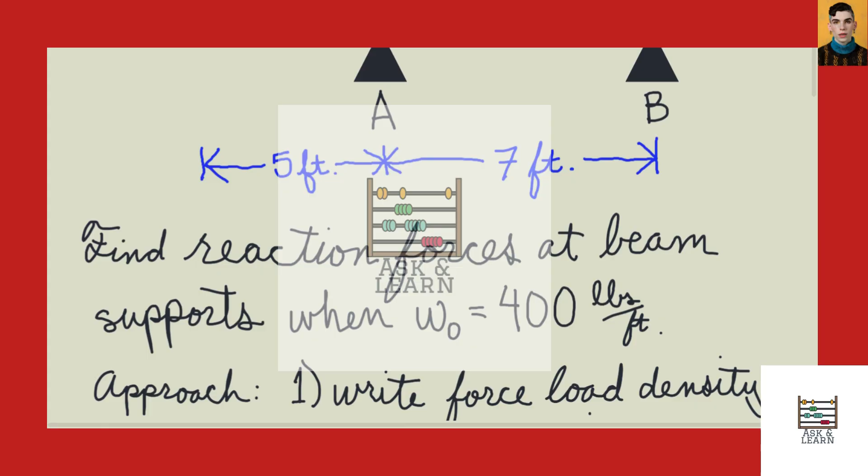We are asked to find the reaction force at supports A and B given their location along the beam at 5 feet from left and 12 feet from left, or the span between them is 7 feet. Later, this problem also gives us the value for W sub naught, our force density value at the extreme left-hand side of the beam. We're given a value of 400 pounds per foot.

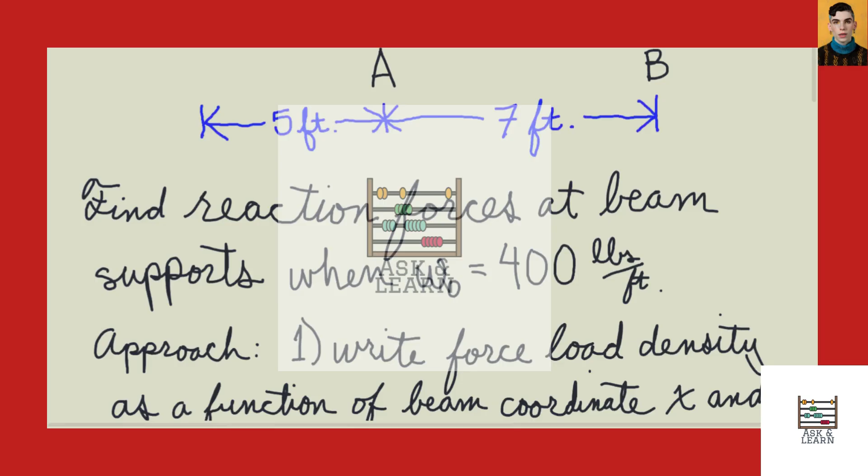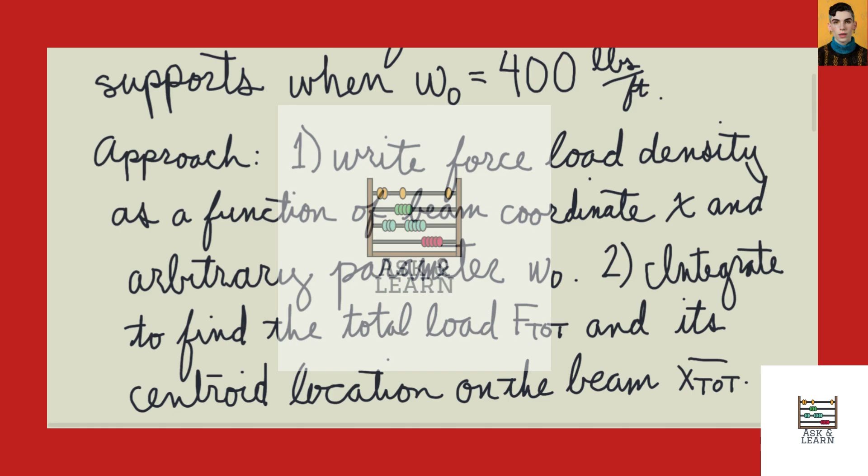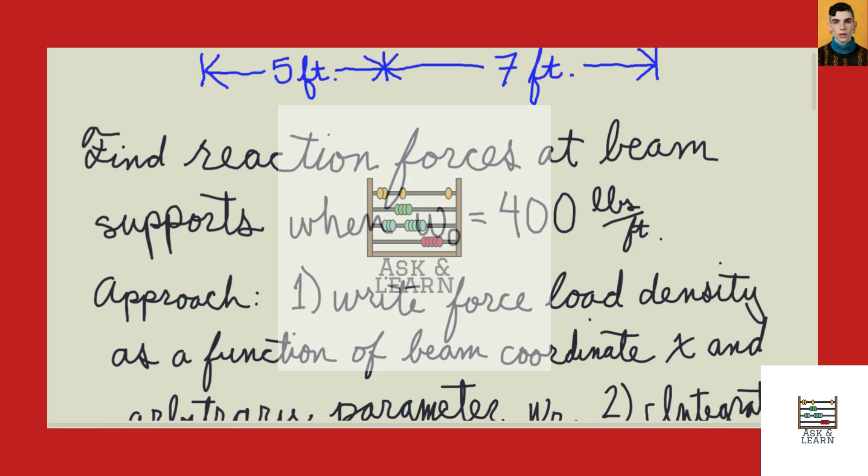The approach we're going to use to solve for these reaction forces at each of the supports is to first write out the load density, this linearly varying relationship, as a function of the beam coordinate x, that's the span from the leftmost point, and in terms of the arbitrary parameter that we are given. But for the next problem, it's better that we keep it arbitrary as long as we can.

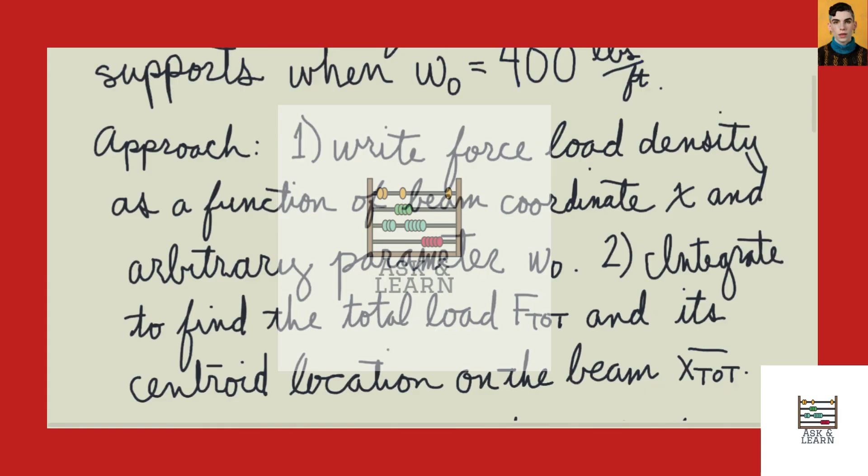This parameter we will symbolically represent as W sub naught. Next, we'll integrate that function to find the total load, integrated over the span coordinate x, to find the total load that we'll denote here as F total. And it's going to be pointing downward from the load. The reaction has to exactly oppose that.

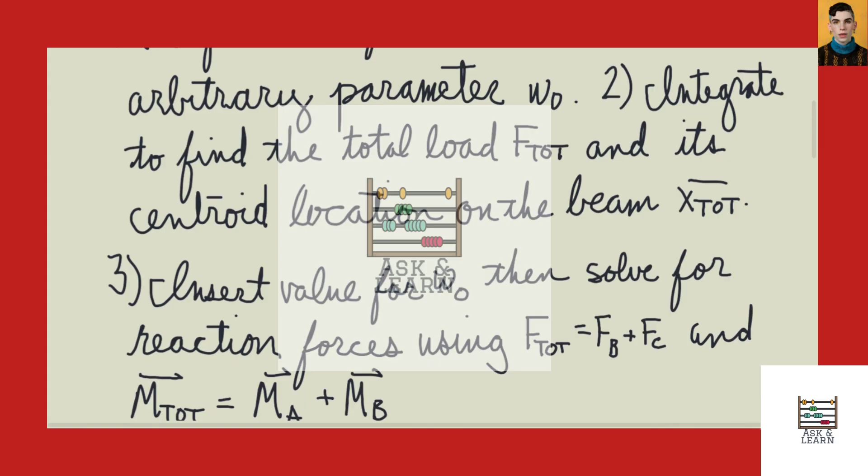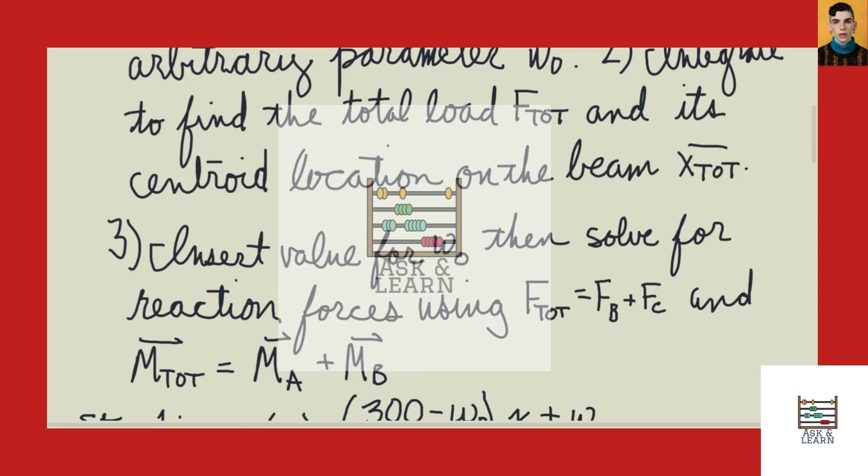We will also calculate the centroid location on the beam using the function we derived in step 1. Finally, we will insert the specific value we're given of 400 pounds per foot for W naught, and then we'll solve for the reaction forces at each of the supports using the usual statics equations that were given.

If something is static, it cannot move linearly in space. It can't have any translation. So the opposing forces of the supports, the sum of those forces will exactly cancel

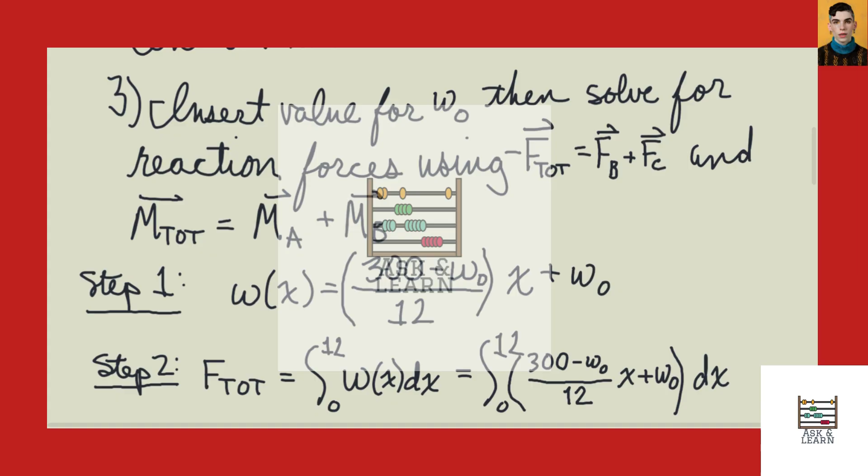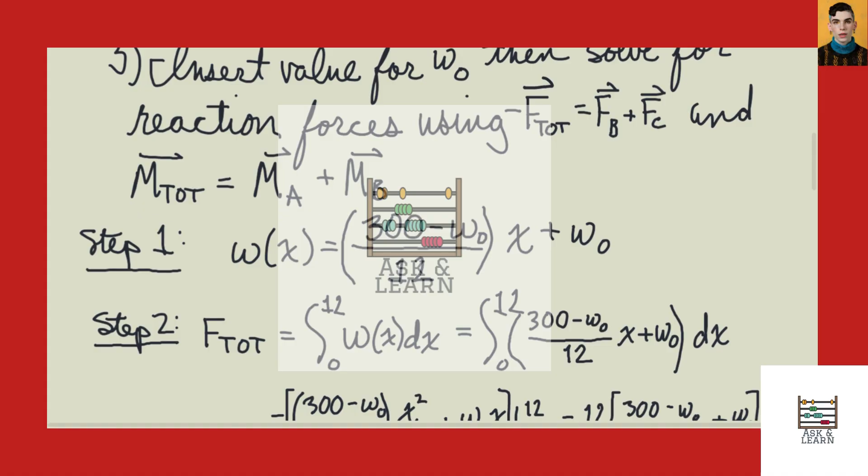the total force of the load. And the other thing is, since it's not rotating in space, the torques about the centroid must be equal and opposite. So this total torque is equal to 0.

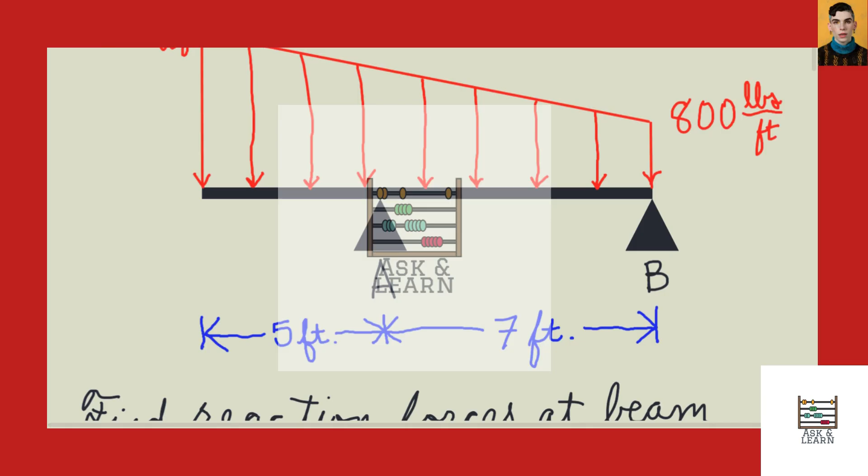So for step 1, again, we're going to write out an equation for our load density relationship, load density function along the span of x. We have our endpoint at 800 pounds per foot. We have our starting point as W sub naught. So we're going to subtract, and that should be set.

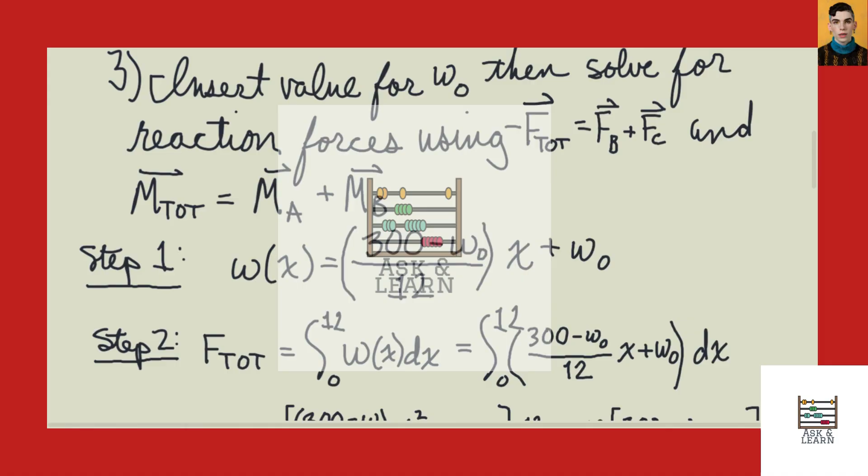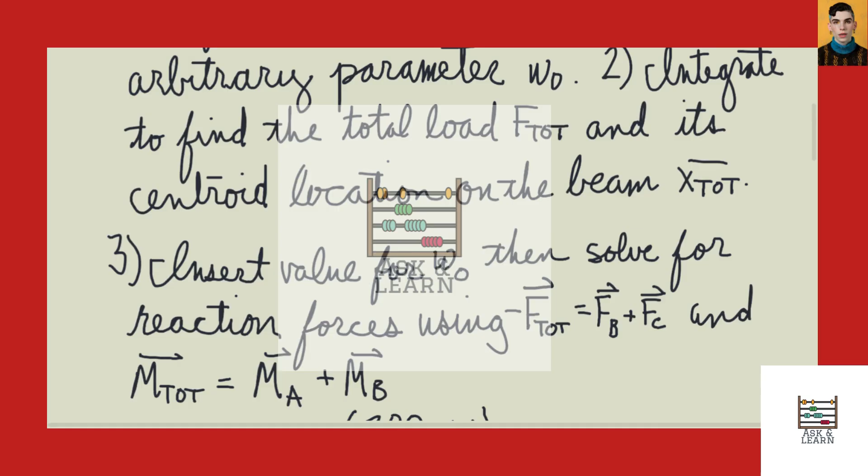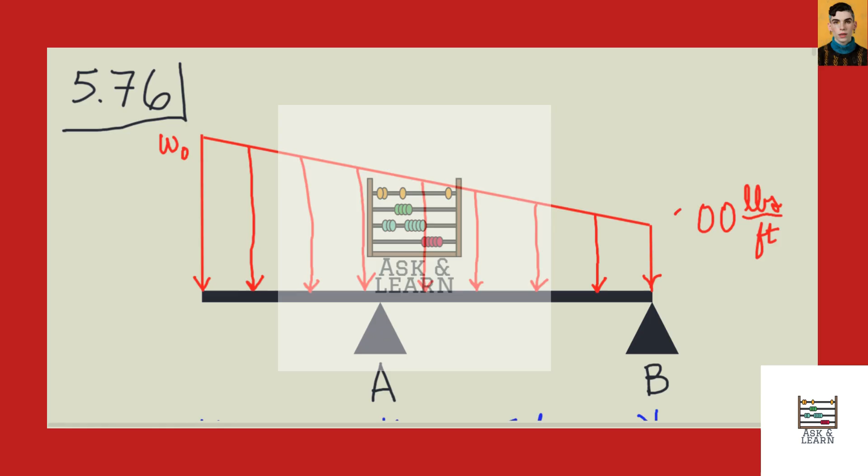My apologies, I just double-checked the problem, and I miswrote the value here. It's not 800 pounds per foot. It is 300, as is correctly stated in my equation. Fix that real quick, sorry about that.

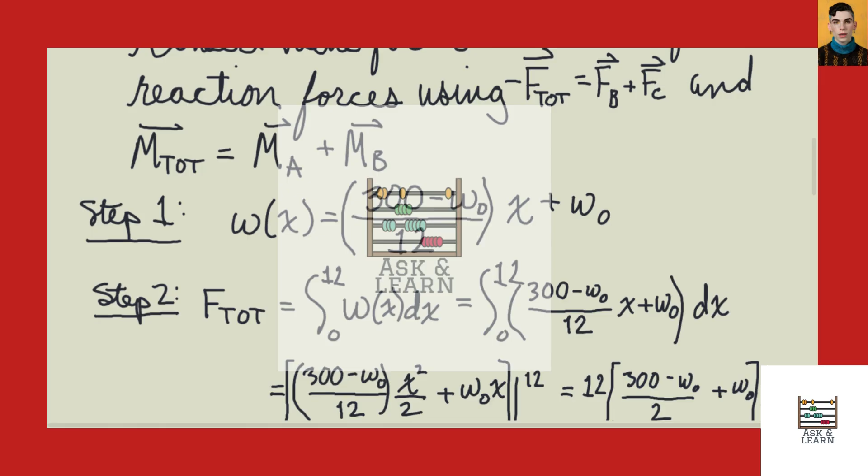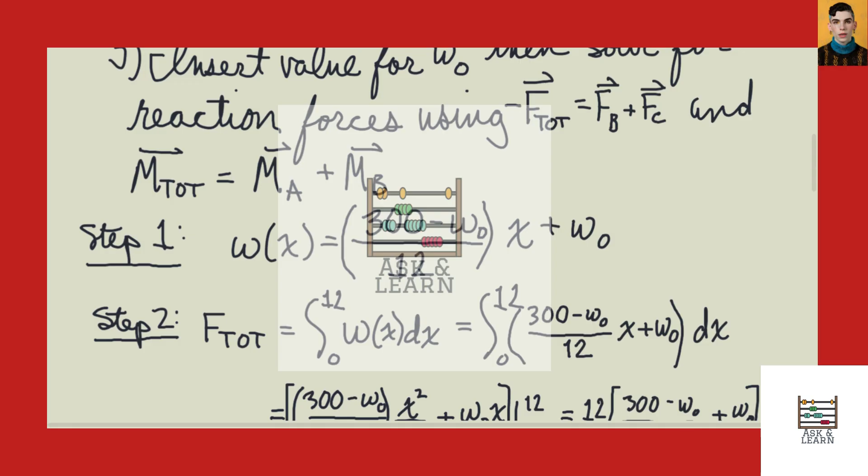So going back to our derivation of the force density equation, we have 300, the y-coordinate at the final location, minus W sub naught, the y-coordinate at the initial location, over a run of 12 feet, so a total of 12. That's our slope. Then for a linear equation, we multiply the slope by our dependent or independent variable x, and then we add the offset, and the offset is at x equals 0.

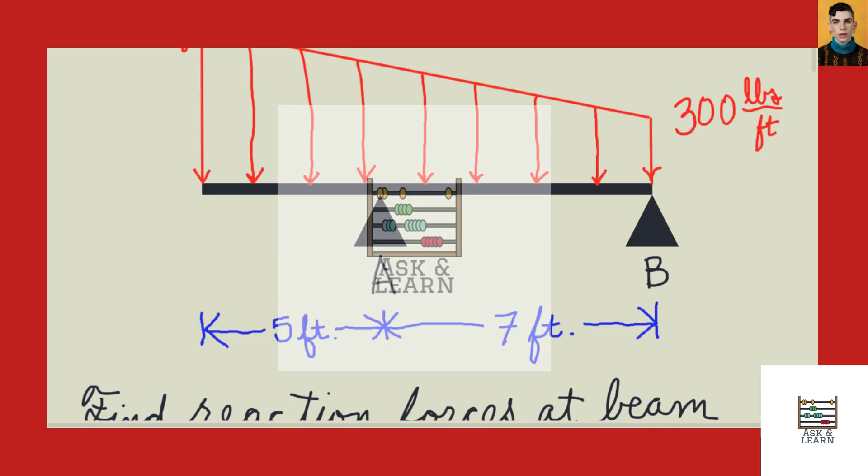We're given a value of W sub naught for our offset. Thus, we have our equation for the load density over the span of x, our independent variable here.

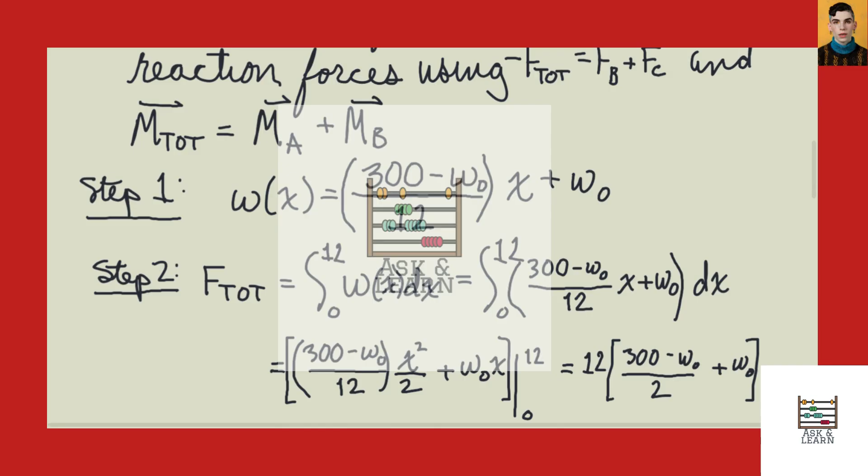Next step is to integrate over the span of x in order to get the total load. So we have our equation just derived above as a function of x times the infinitesimal dx that we sum over the span, perform the integration. We're integrating from 0 to 12, the total span of the beam.

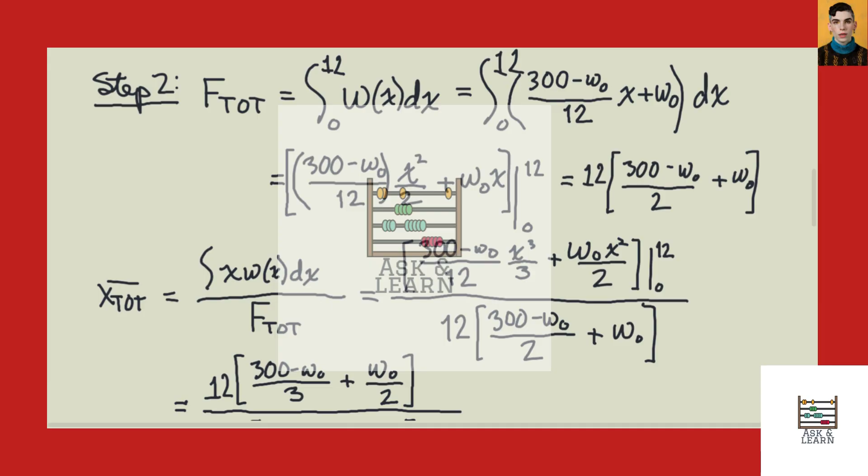Our independent variable x goes to x squared over 2. Rather, that was x dx goes to x squared over 2, and w sub naught dx goes to w sub naught x. We evaluate from 0 to 12, and we are left with this equation for our total load in terms of W sub naught.

Secondly, we can find the centroid by this time integrating the product of our x coordinate times our force density function, and then our infinitesimal dx, performing that integration, evaluating from 0 to 12. And I'm sorry, I went too fast there.

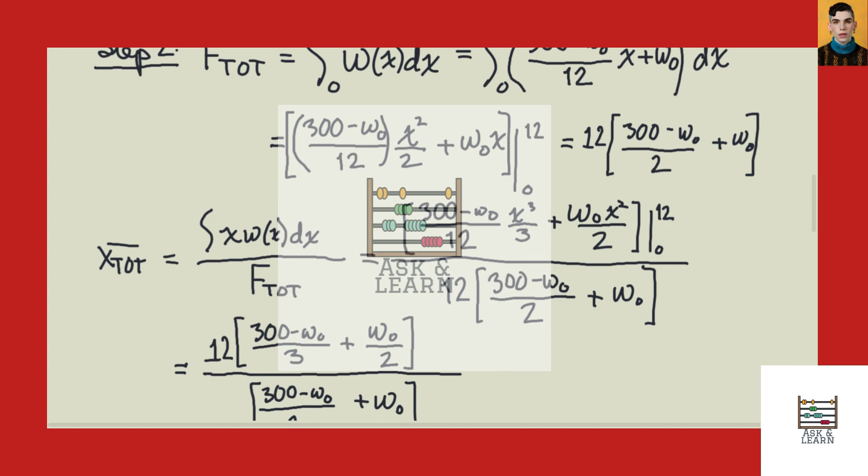That numerator, the integration of the product of x times w of x dx, is over our total load, which we just calculated in the step above. So evaluating our numerator, we have 300 minus W sub naught over 12 times x cubed over 3, plus W sub naught x squared over 2. That numerator, both terms evaluated from 0 to 12, and then dividing by our total load relationship below. This can be expressed as follows.

Okay, for step 3 we will use those two equations from statics: the reaction forces must sum to the total load, and the torques must sum to zero.

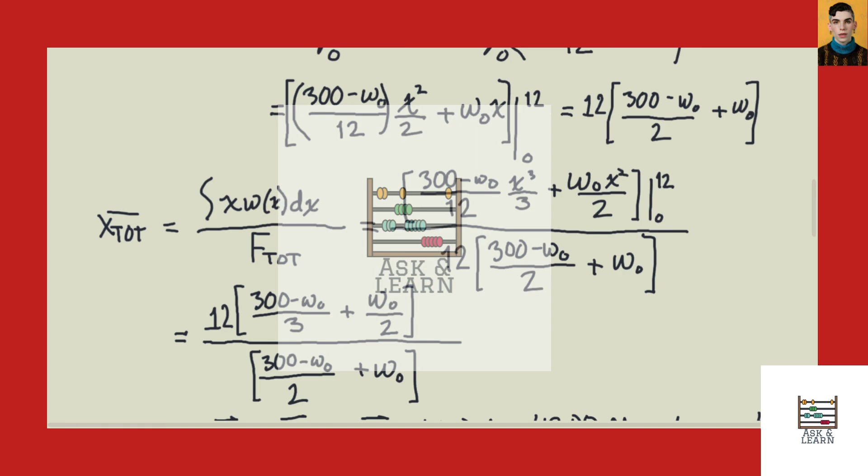Finding the magnitude of the total load by plugging in W sub naught of 400 pounds per foot into this equation, you should get 4,200 pounds for our total load.

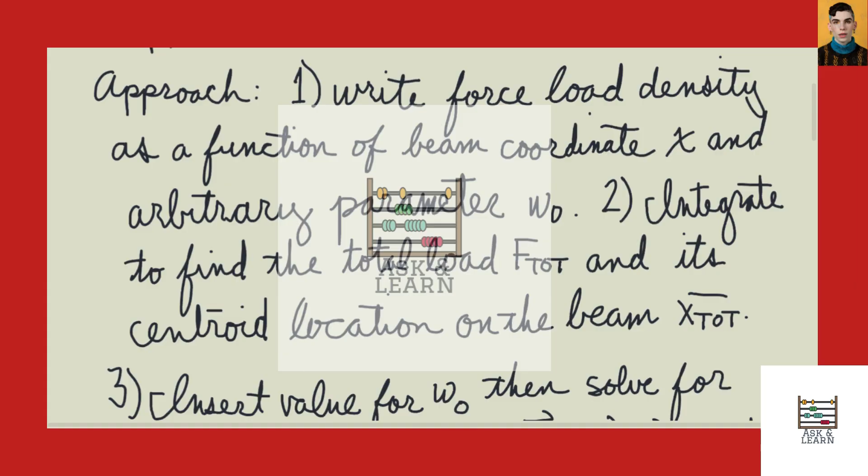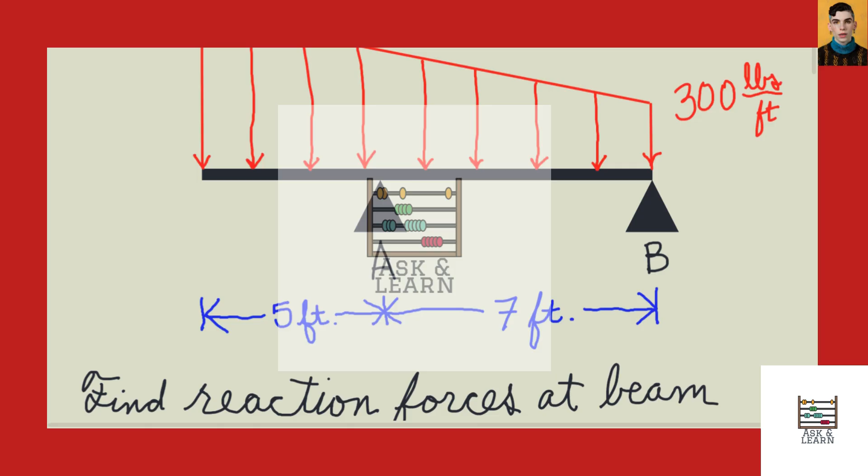Looking back at our diagram, wherever the centroid is at x sub total, the moment arm about it will be its location, x total, minus the location of support A, which is 5 feet. Or rather, the other way around, 5 feet minus the location of x total.

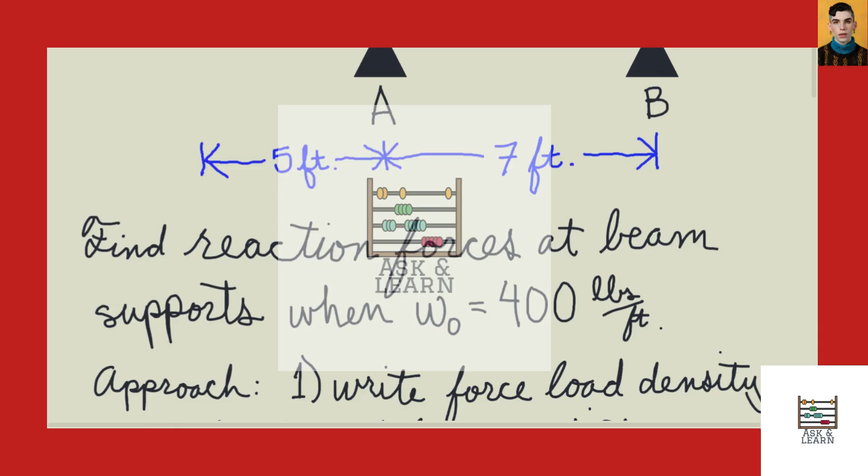Because we don't yet know where this centroid lies, I'll make my life easier with sign conventions and just multiply the force at FB by the absolute value of that moment arm, calling the direction of that force negative. That's our first term, the torque about the centroid exerted by reaction force B.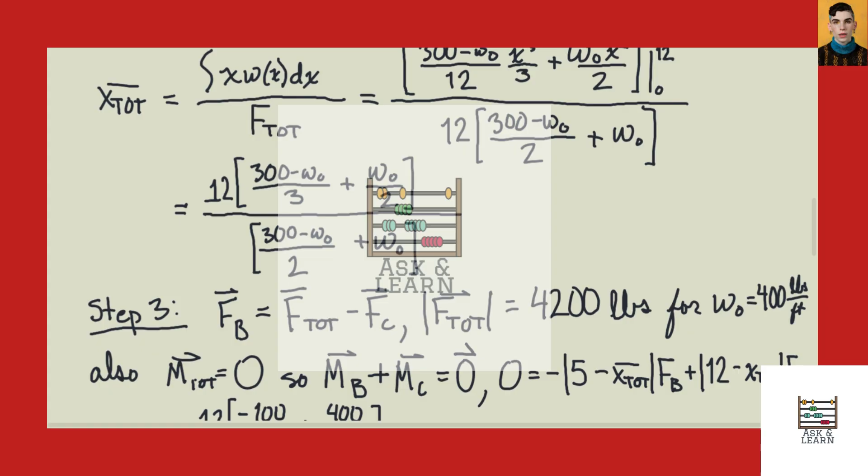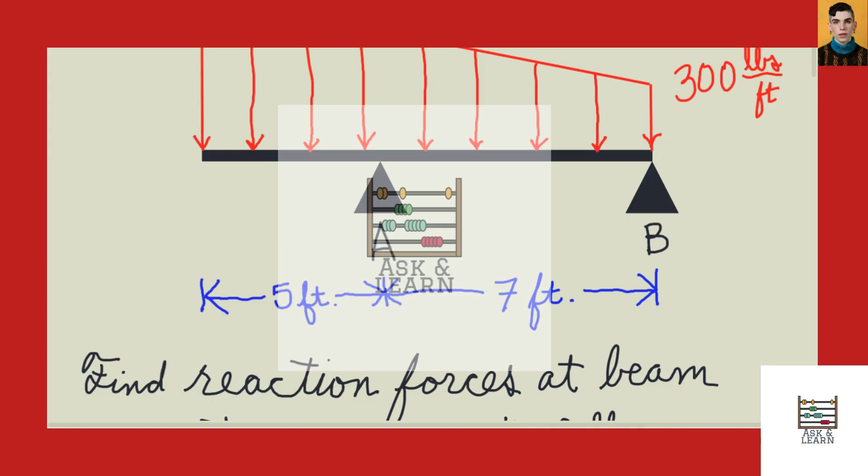We do the same thing for reaction force C. It's located at 12 feet from extreme left. We take that 12 feet and subtract the location of the centroid, which we don't yet know, so we'll keep it symbolic. That moment arm will be 12 minus x total, the location of the centroid. We take its absolute value for that moment arm and say that torque is in the positive direction.

Here we are, sorry, cursor's in the wrong place. That moment arm times the reaction force at support C is expressed as follows. Those two torques are equal and opposing.

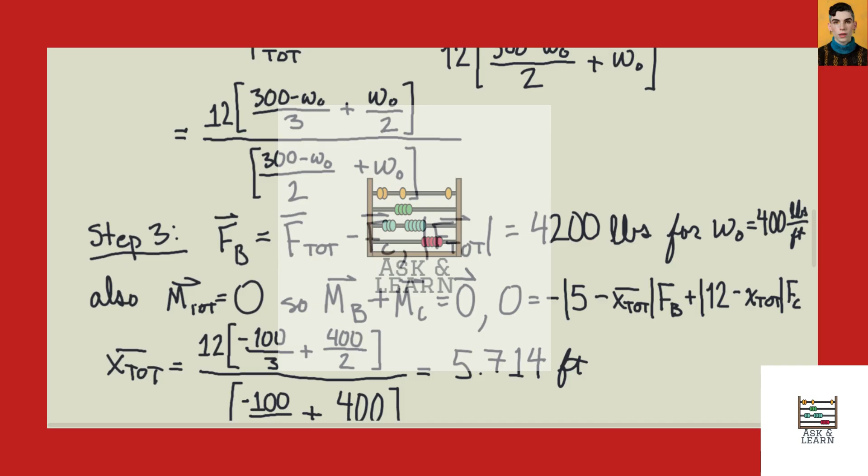So given the sum of the forces and the sum of the torques, we can now solve for the location of our centroid as well as the reaction forces.

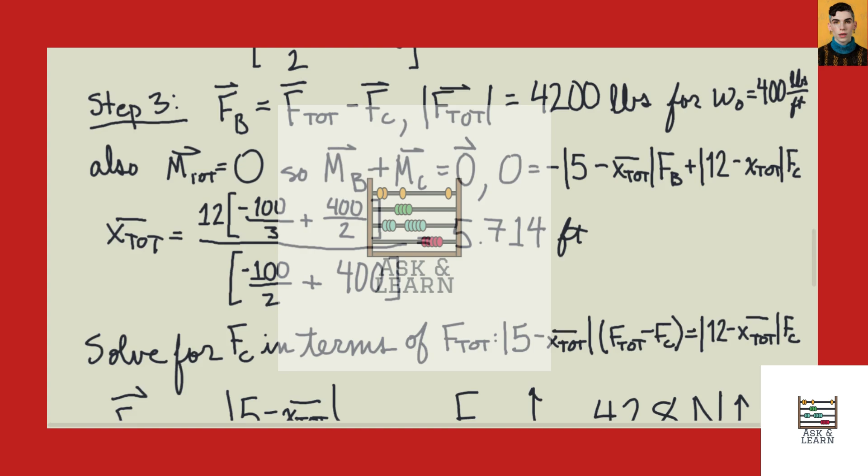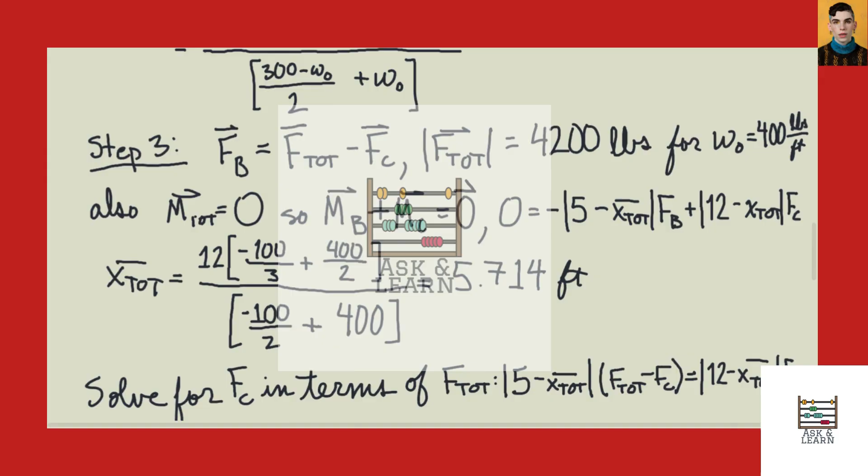We can find the value of the centroid by plugging in W sub naught equals 400 into this equation for x total, and we find it works out to 5.714 feet. That would lie very close to support A, probably in the neighborhood about right here.

Now that we have a numerical value for the location of our centroid, we can plug that into our sum of torques equation here, which I'm going to underline because it's a very important equation for this problem. So we want to draw our attention back to that.

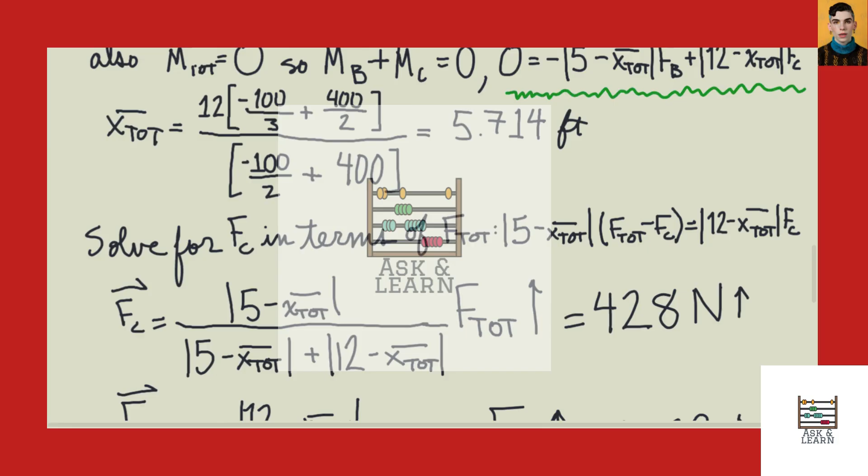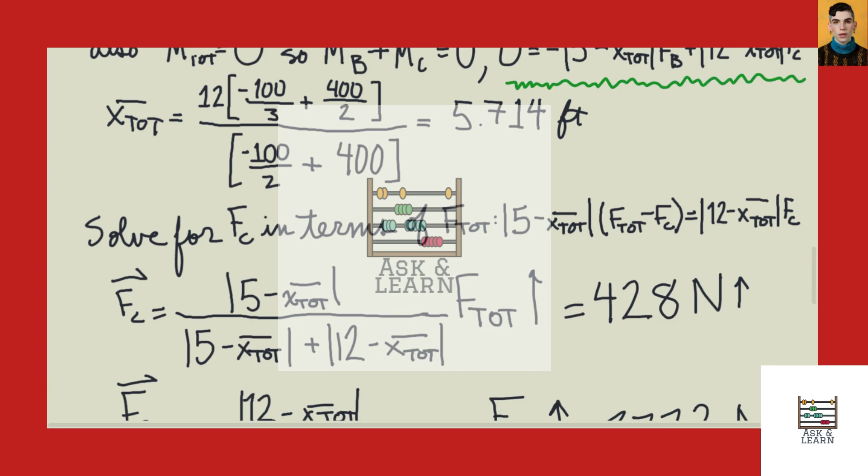Given this, and now knowing the location of the centroid, we can use these two equations to solve for both FC and FB, depending on which one we subtract from and insert into our torque equation. Here I've solved for FC, and it comes out as follows.

The value is the difference between the location of support B, which is at 5, minus the centroid, divided by this denominator, which is the sum of the two moment arms about the centroid.

That entire proportion is multiplied by the total load, and it's going to go in the opposite direction of the total load. So right now, to keep track of things, I'm going to put an upward arrow because the total load was pointing downward, and our forces must be in opposite directions.

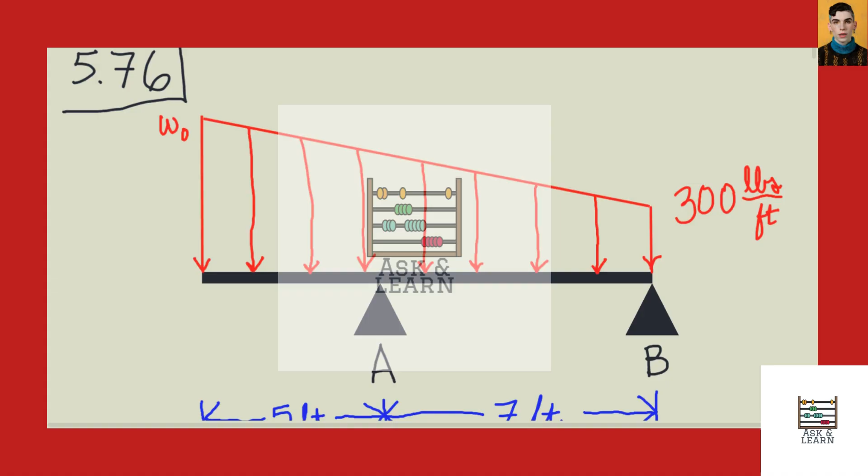Working out those numbers, we have 428 newtons in the upward direction for the reaction force at support C. We expect this to be much smaller than the total load, because if the centroid is here, the torque is exerted across a long moment arm, so the force doesn't have to be as great to oppose a force that is close to the centroid with a short moment arm here.

I apologize, but I used the wrong values here for the supports. Let's fix that while we can.

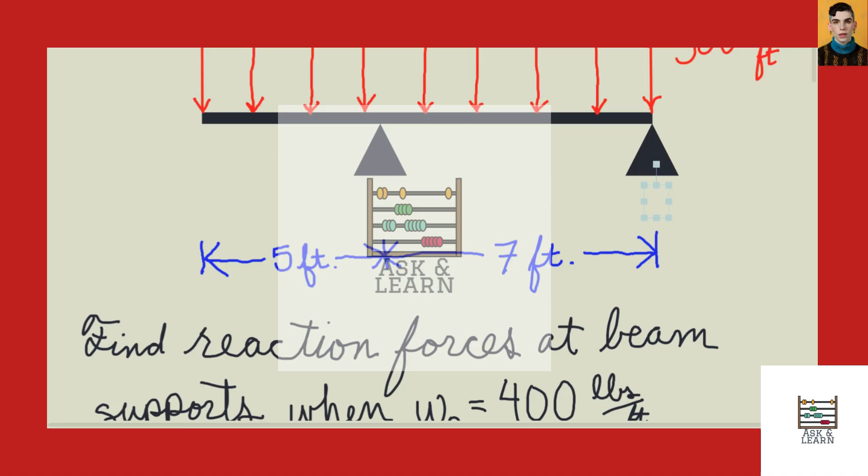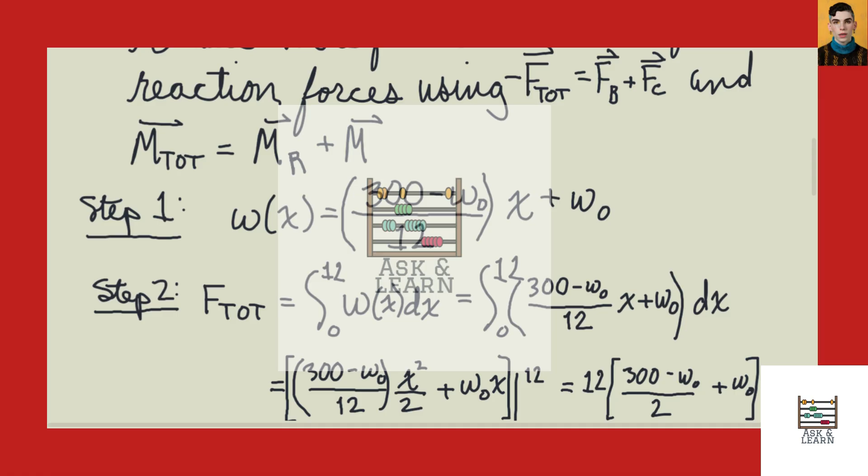This should be B, and this should be C. My apologies again, I see I made the same mistake here. Let's put these right - that was the torque about support B and the torque about support C. Okay, back to where we were.

Likewise, the reaction force at support B uses the same denominator, but the numerator is now the other portion of the span, the longer moment arm of the two, in the numerator, over the same denominator which is the sum of the two moment arms, times that whole proportion times the magnitude of the total load, and the direction of the reaction force will be upward.

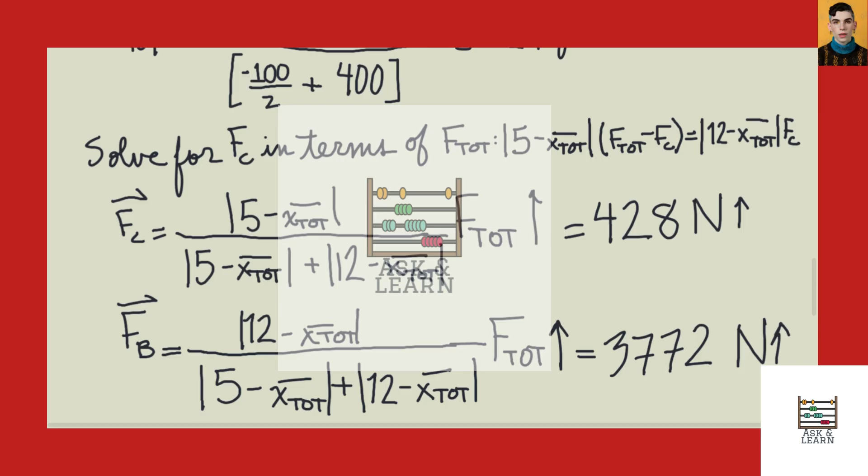You plug in the numbers for that. Remember, our value for x total was 5.714 feet. Plug in the numbers for our centroid location there, and you should get 3,772 newtons upward.

And that concludes our problem. Let me box it. There we go.